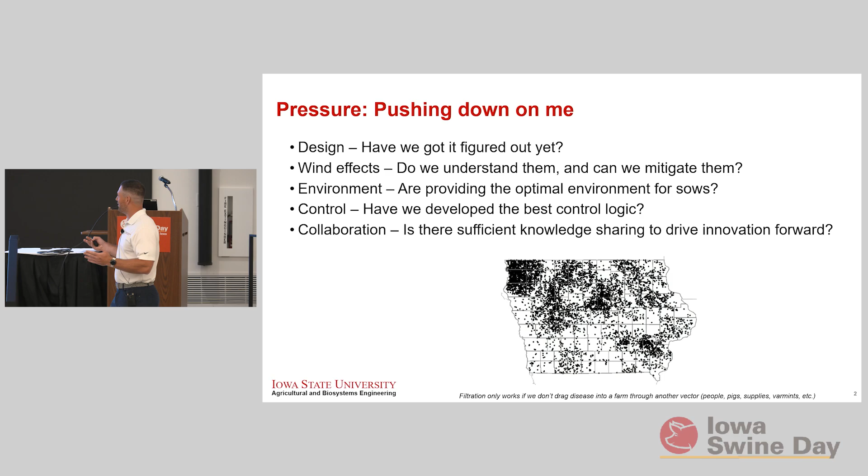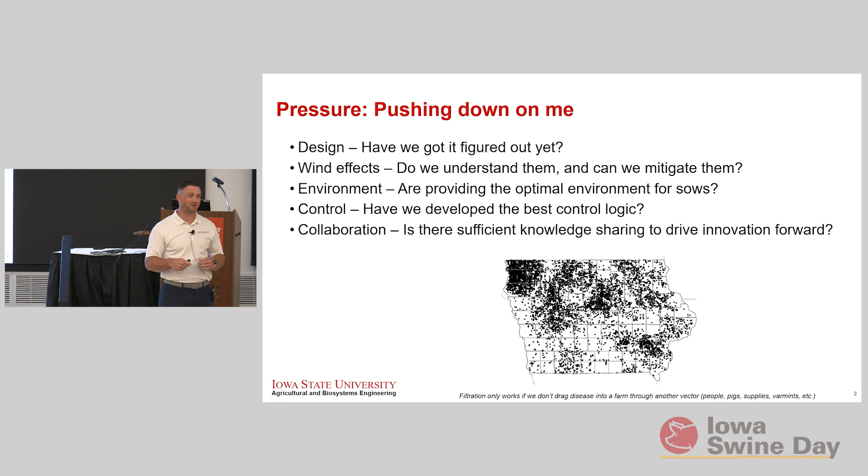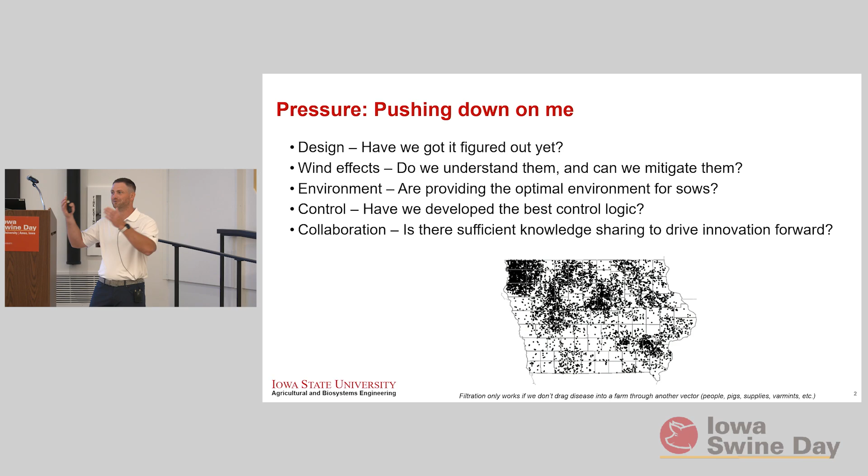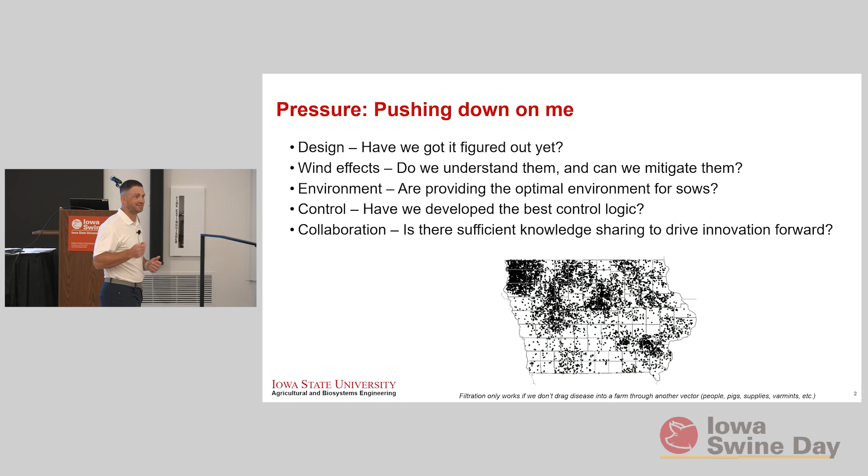So in areas of high disease pressure, filtration is generally a pretty good option because there's just a lot of pathogen in the air. The talk before me was perfect to set this up on filtration—that last line at the bottom, filtration really only works if we don't drag it in, right? So I think following those ABCs is a great thing. You have to have that done first, then comes filtration. If you can't do the ABCs right, I'm not sure filtering is really the best option, because filtration costs a lot of money to do and a lot of money to keep doing, and it's hard to keep it going right. So get the ABCs right—that was a perfect talk to go before, so keep that in mind.

So things to think about when considering filtration and other factors—these are just some common ones.

Location - are you in the middle of nowhere South Dakota versus in Hardin County? Two totally different locations with two totally different disease pressures. Climate also plays an important role when designing these systems, because different climates require different ventilation rates, different cooling systems, different things to think about.

Cost - is it worth it? Longevity - when am I going to have to remodel this, and am I located somewhere where I'm going to have to change filters more frequently? Pig needs - what type of pig is it, and what do I need to provide for it?

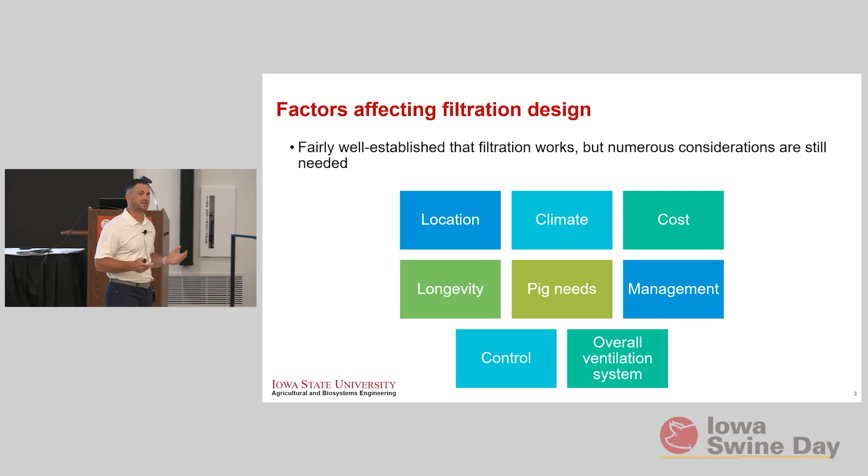Management - does it fit within our existing management structure? What is all going to have to change when we go to filtration? Filtered sow farms are a lot more difficult to navigate when you're inside them and moving about. They're not as easy - you can't do certain things that you could just do at a finisher.

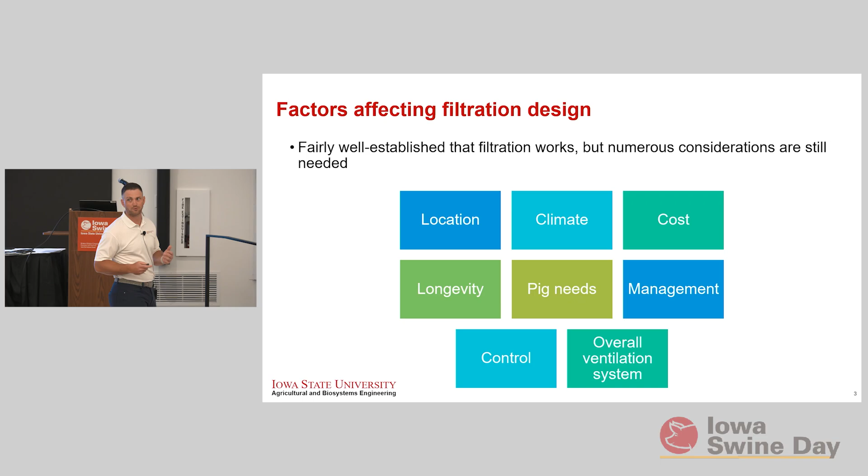Control - what kind of control logic am I going to use to do this? And then generally, the whole overall ventilation system is important to keep in mind, because these systems are far more complicated than a standard run-of-the-mill finisher. There's so many more moving parts, so many more things that all have to work together for that system to truly be effective and achieve the results we're looking for.

So diving down more into the ventilation side of things - air distribution patterns, where do I put my inlets, how do I get that distribution? Especially when you get to a lot of these larger farms, it's hard to get air all the way across a 100-some-odd-foot wide by 400 or 500 foot long barn. That's just a lot of volume of air to get distributed evenly.

Fans - what kind of fan am I going to use? Probably wouldn't want to use a belt-driven fan in some of these systems, because there's just a heck of a lot of pressure that those fans are going to have to overcome. There's some good ones, but those belt-driven fans don't hold up as well as some of the newer direct drive fans. Making sure we get the correct air exchange rate.

If it's on a negative pressure filtered farm, do we have enough soffit opening to get that air up into the attic so it can go through those filter boxes?

What do we do about pit transitions and annexes? Do we vent those, or do we just cover them up? How do we manage that within the whole system? If it's on a negative pressure farm, obviously we probably don't want those, because they're going to become inlets - then it's going to get sucked in.

Fan staging - however we want to do it, we've got to keep that in mind. Are we getting the transition between min and max correctly? Supplemental cooling is most likely probably just going to use an evaporative cooling pad, so that one's actually relatively simple.

Switching over to positive pressure is a whole different line of thinking than negative pressure - you actually have to bend your thinking. The more I think about positive pressure, the more it makes my head hurt, and how much I don't understand it sometimes, even though I feel like I've got a good grasp on things. When you switch to positive pressure, you do have to switch how you think about things, because it is not a traditional negative pressure system.

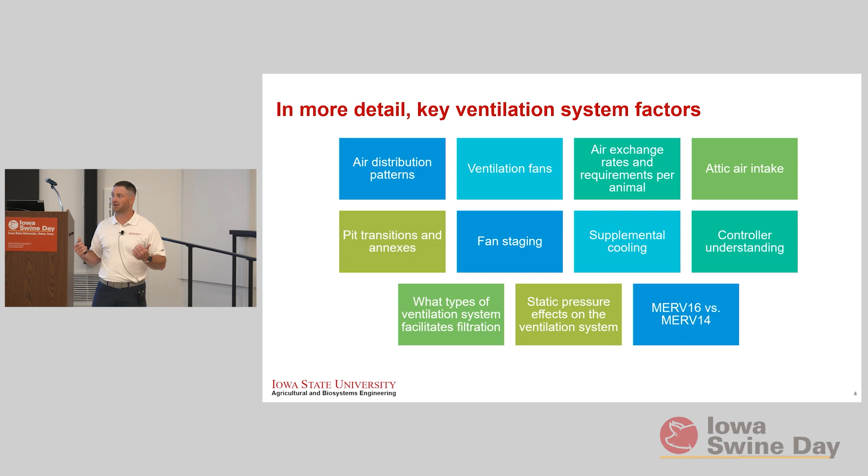The same is said on positive pressure. I think we sometimes overlook the need for reducing infiltration on positive pressure barns, because we've got to keep the pressure in - if it's going to leak out, guess where that air doesn't go? To the pigs. If it's blowing out through your attic, you're losing pressure and airflow that should be getting down to where the pigs are at, or if you're losing it through the room, then you're losing control of where that air is actually going to exit those barns.

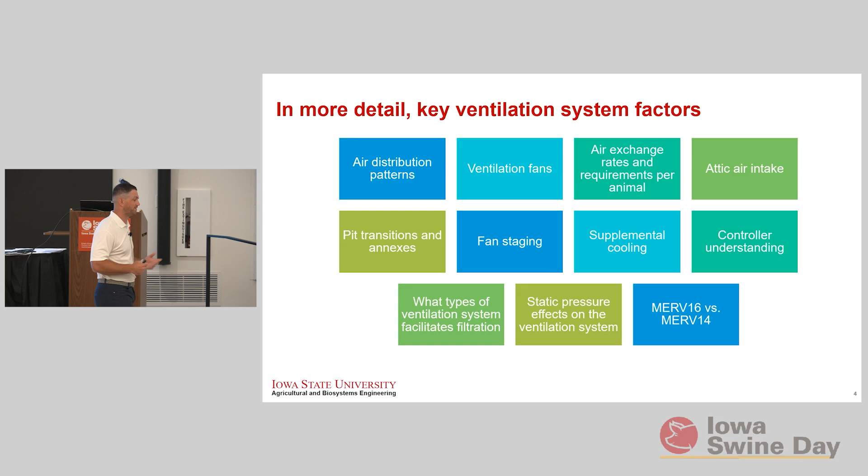Filter selections, everybody has their preference and what kind of pressure you're at in that area. So just a brief overview on negative pressure. I'm sure most people are familiar, but if you're not, it's basically taking a traditional system and adding filters to it where it makes sense.

Visualize where I'm talking, follow the red arrows. So you bring in air through an evaporative cool pad, it goes up into the attic. There are filters mounted on the tops of the inlets, then it goes through the inlets, and exhaust fans pull the air through the system.

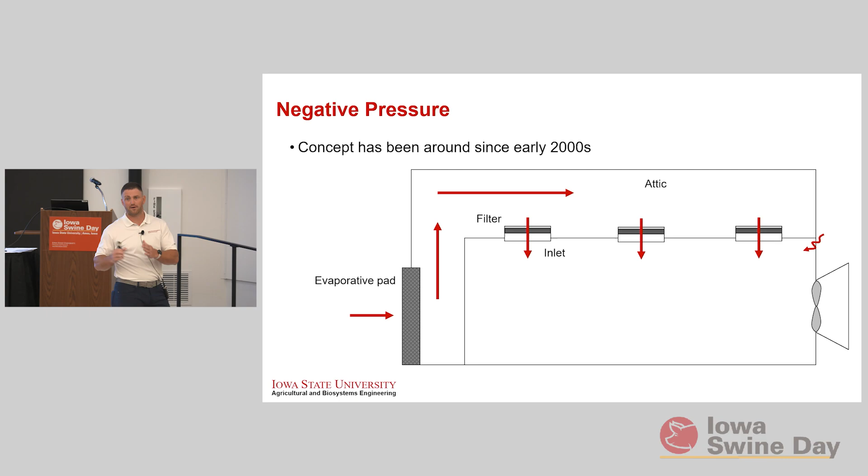What I don't have drawn here, and which I should, is either a double shutter—a lot of farms will have two shutters for backdraft prevention—and I should also add a sock on them too, just for good measure.

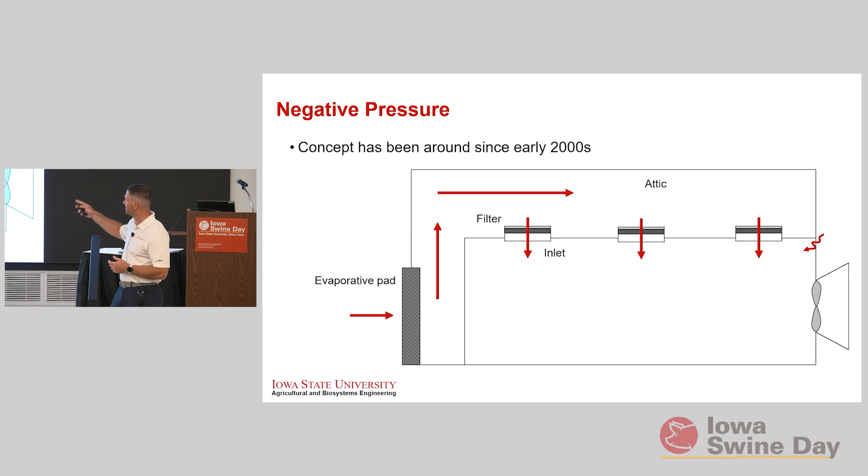You can also tunnel these by, instead of bringing air up into the attic, taking out that end wall and putting in filter walls, usually in a zigzag pattern, to increase the surface area to accommodate those filters. So what that looks like up in an attic are traditional filter boxes.

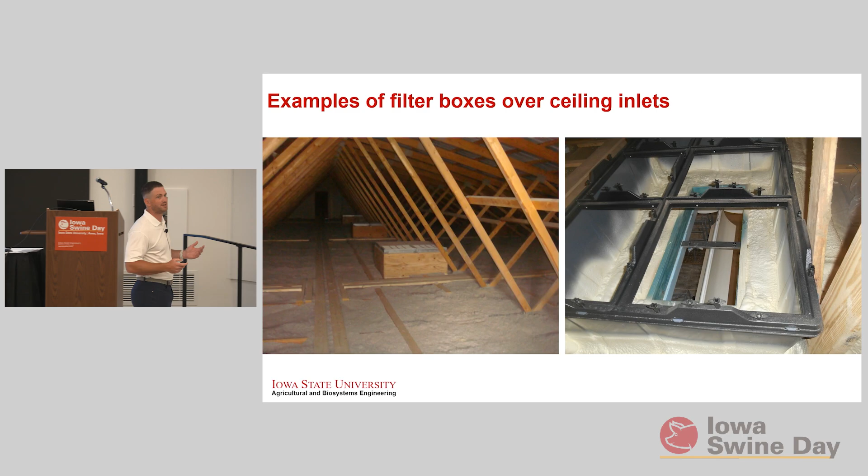A lot of times these things have to be spray foamed, because under negative pressure, air comes in, and we want to make sure all that air goes through those filters. For a more tunnel-style barn, it could also go up into the attic. Here's an example of air on the front side of the filters, and on the back side, again, all spray foamed. Minimizing infiltration is the most critical part.

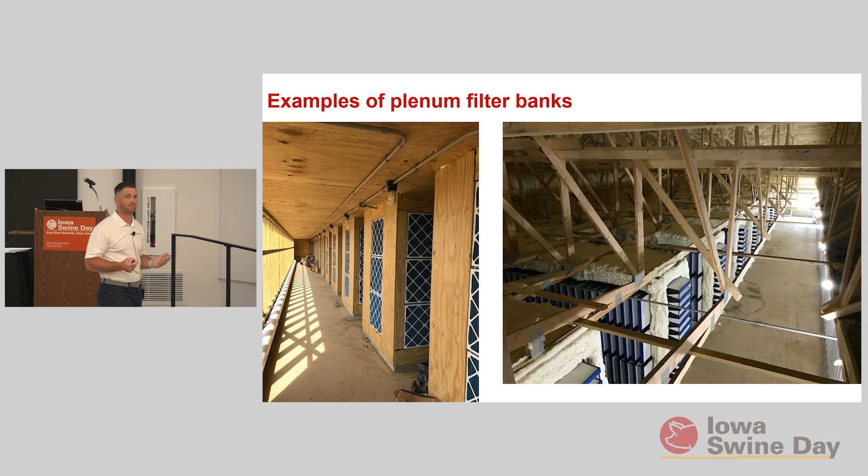Backdrafting of unused fans is critical. Shutters leak, they leak really bad. So if that fan is off, it is most likely leaking, and if it's leaking in and that air is not filtered, it is dirty air coming in.

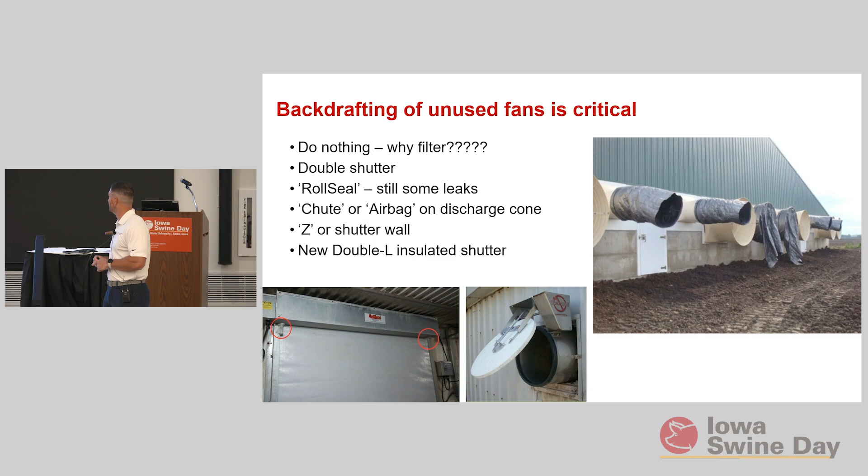There are a lot of different ways to do backdraft protection. The most common I see is a double shutter wall and socks. As much as I don't like putting socks on fans, because it reduces that fan's output even more than it's already being choked, socks are usually a good way to go—but those socks have to be maintained. A lot of times they're all over the place, have holes, or don't seal up.

So switching over to positive pressure, which gained popularity here in the late 2010s. To think of this, it's the opposite of negative—now we are pushing air inside the barn and having it exfiltrate, or leak out.

The benefit here is that air is going to leak out of the barn through any cracks, gaps, and joints where we can't seal it up, rather than pulling dirty air in.

Often we'll bring air through an evaporative pad, it goes through the filters, then the fans push air into the attic, which then pushes it through the inlets, and it exhausts out through a controllable opening in the room, usually distributed along the length of the room to help even out where that air gets distributed.

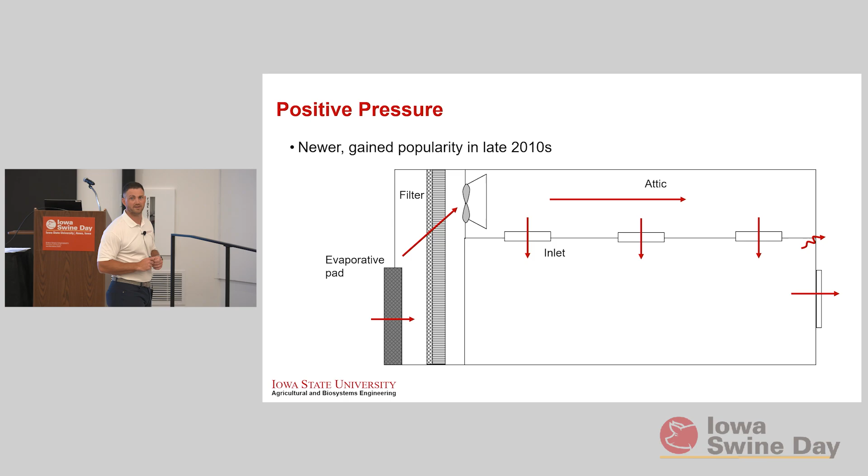So if you're paying attention, you'd realize there is negative pressure here, between the filters and the fan, and that area has to be sealed extremely tightly because it's a vulnerable spot where air could get sucked in. Usually those rooms are pretty much coated in spray foam to help mitigate that.

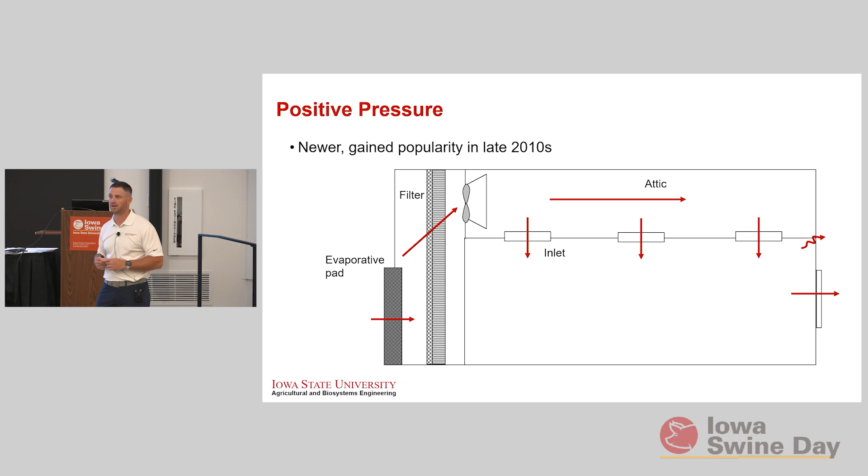There are a lot of different designs. Thankfully AP and Munters are in the room, so I got lucky on that one—these are just two typical designs. I'm not as good as Suzanne and don't have my disclaimer up there; it was on the first slide if everybody was reading, so no hard feelings to whoever's design I'm missing. There are different ways to do it.

There's a lot of variety—pads versus pads in front of filters, filters behind pads, each with pros and cons. Different ways to go between using ceiling inlets versus tunnel. Just a variety of ways to do it, each with some pros and cons.

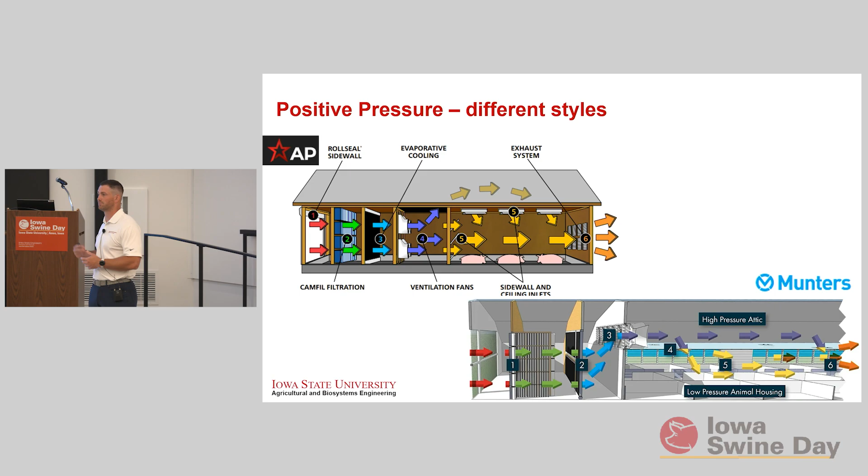With these barns in positive pressure, the pressure part is important, and maintaining that positive pressure is important, so we must monitor it. If I'm working with a lot of people, I'll ask them, have you ever seen a manometer before? Most say no, and then you go to a positive pressure sow barn and that's all you see. They're everywhere. It's like they disappeared for 20 some odd years and then magically reappeared, except now they're about 3 times more expensive than they used to be, almost $100 now. But you have to monitor pressure and watch it because you've got to maintain that positive pressure to keep the air leaking outward.

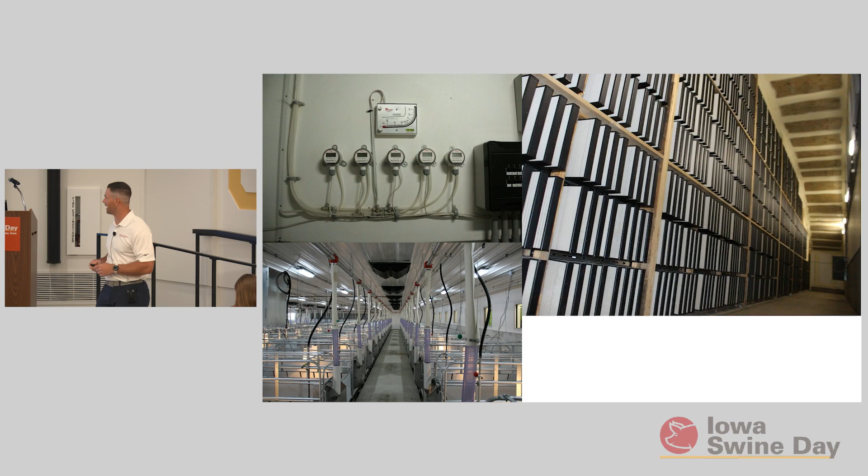So just examples of what it looks like, all through the ceiling inlets and backside of some of the filter walls. In this one with the fans in the upper right, that room is spray foamed, again to help keep that negative pressure chamber as leak-free as possible.

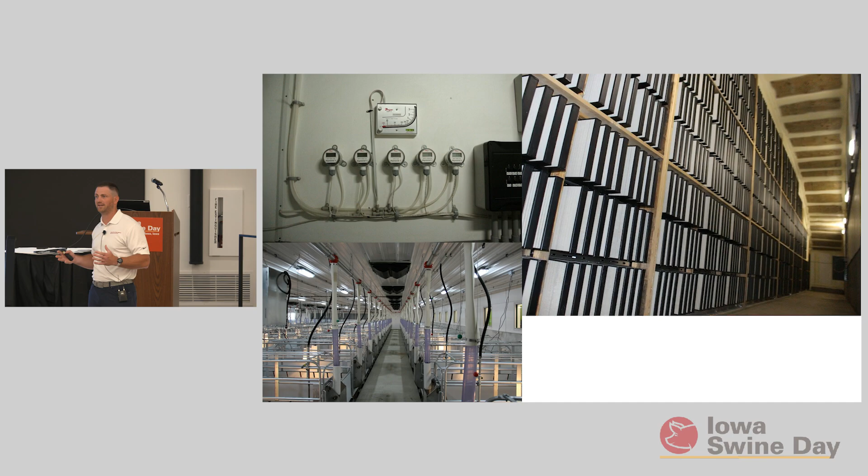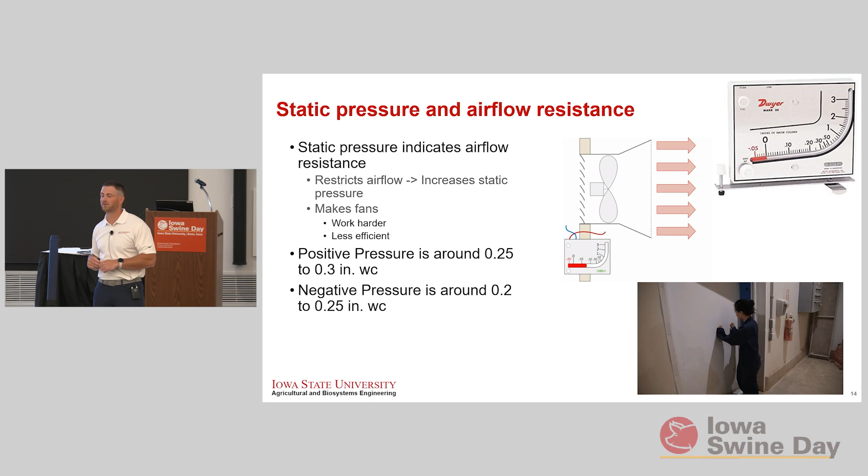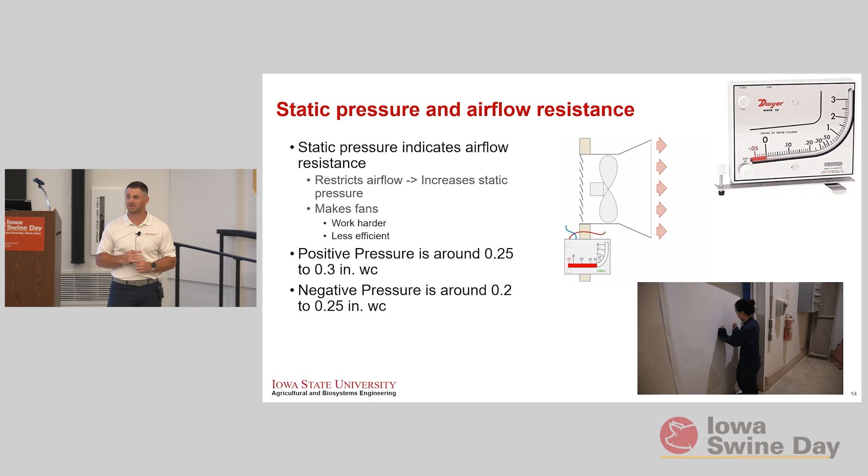Static pressure and airflow resistance, probably a review, but as static pressure increases, the airflow from the fan decreases. We really have to keep this in mind with adding filters, because all we do with these barns is add resistance, which decreases the amount of airflow those fans move. In positive pressure, those fans are going to work against about 0.25 to 0.3. Negative pressure is probably around 0.2 to 0.25, and I think that could even be higher as you start adding double shutters and socks, possibly much higher once you add all those things up.

Example of too high static pressure: if that door slams shut and almost takes your fingers off, that's probably a good indicator that the barn is choked for air and something needs to be opened up, whether it's in the soffit, inlets, or exhaust somewhere—that barn needs to open up.

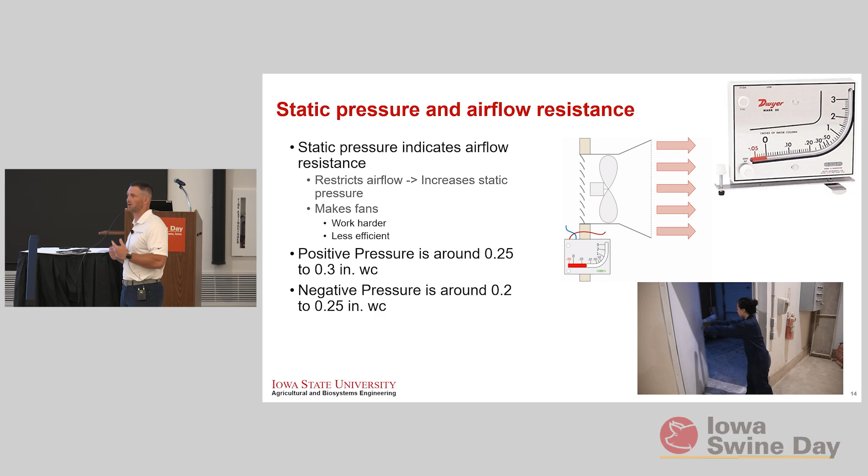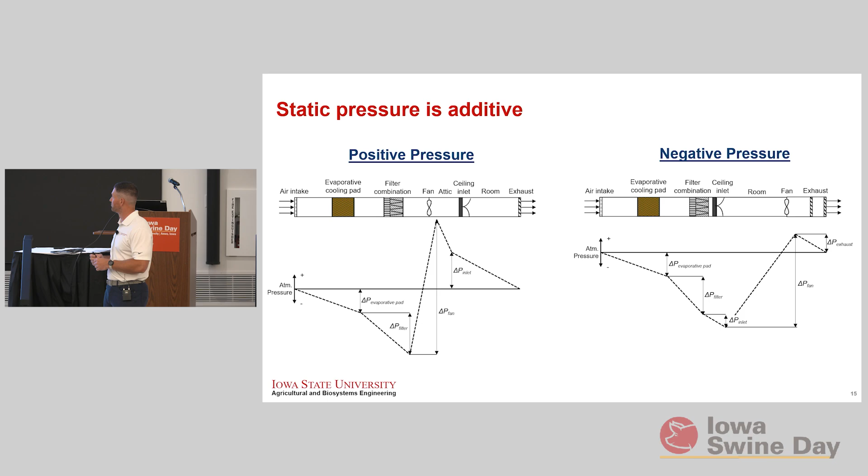So with negative pressure, the fans, or with positive pressure, typically pad and filter come before inlets and exhaust, versus negative pressure adds up all the way before it gets to the fan, where it's the last point in the system.

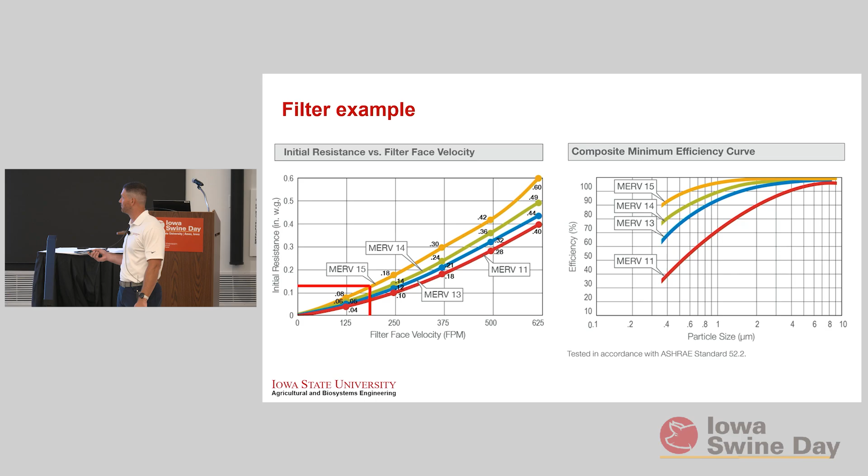Ceiling inlets are always going to be somewhere between about 0.06 to 0.08. You can't get rid of those in positive pressure because that's where the air has to go through, and you need a velocity through those inlets to make sure the air actually gets into the barn and starts to mix.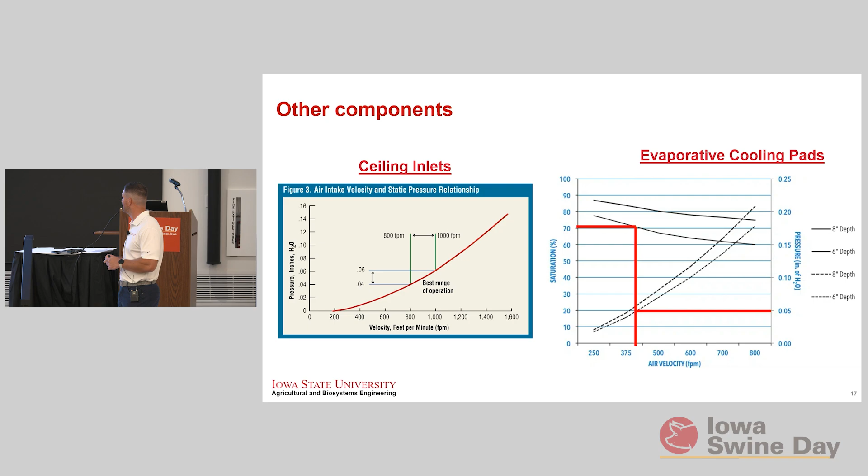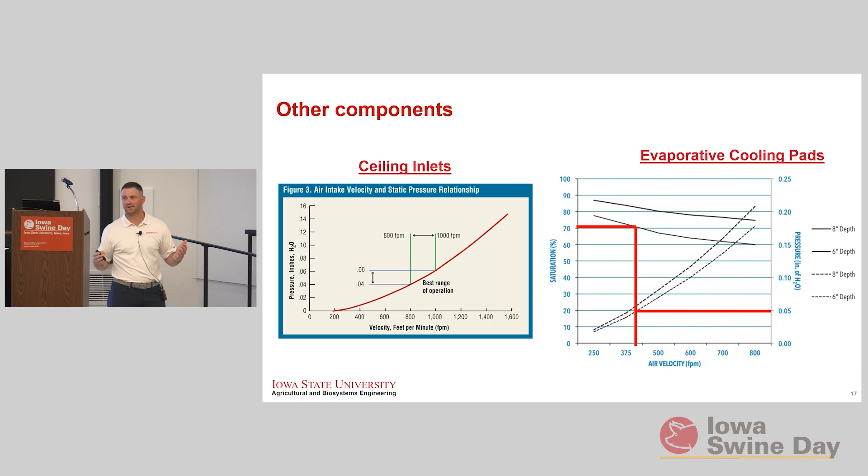Evaporative cool cells - the more I look at these, the more I think it's important to pay attention to different manufacturers and understand what the static pressure loss is and what face velocity you want to size at. They all tend to be a little different. This is an example I pulled, showing that at just shy of 400, they're at about 0.05 and a saturation efficiency around 70%. Some farms tend to go a little higher, knowing that if they have filters, evaporative pads are a little cheaper, and if you want to decrease a couple 0.01s off total static pressure, increasing that evaporative pad area is a good way to reduce restriction on the system.

Airflow ratio - not one we use commonly.

Oh, come on. What did I do? Sorry. Anybody know the airflow ratio equation off the top of their head? It was just up there for a split second.

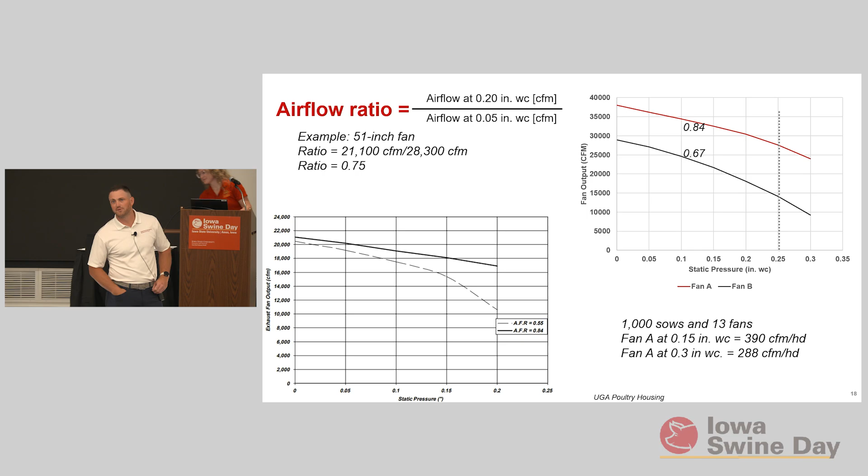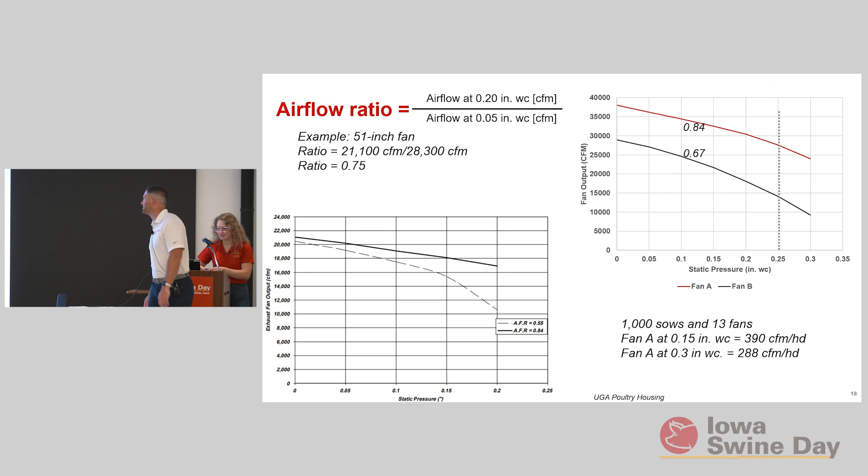Airflow ratio is the ratio of the fan airflow at 0.2 inches of water column to 0.05. What that tells us is how stable that fan curve is. We're looking for a stable fan curve, because as we add resistance, and as barns age and static pressure increases over time, we'd like a nice pressure-stable fan with a high airflow ratio. I usually like to be above about 0.8, because then as things build up and get dirty, that fan will still keep its output at a relatively high rate and not fall off, which you'd see with an airflow ratio below about 0.7. Those fans are going to drop off pretty good.

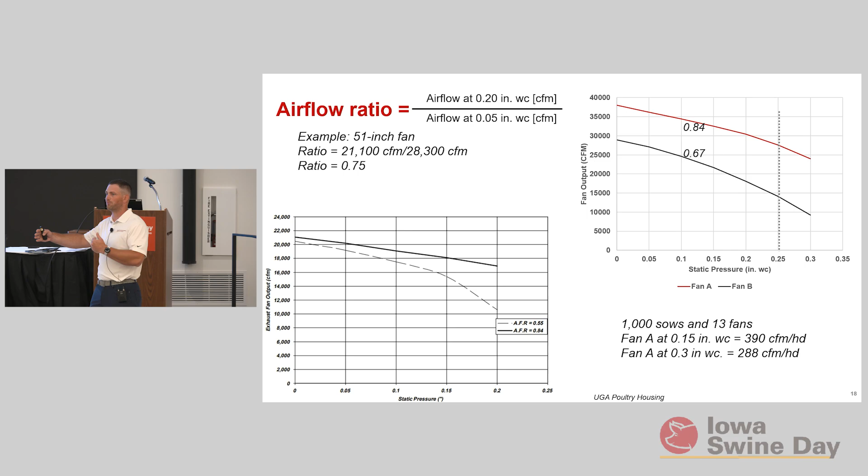These are two examples of fans showing the difference between the one on the left at 0.55 versus 0.84, and the other one's 0.84 versus 0.67. If you do some math on 1,000 sows and 13 fans, if you have fan A at 0.15 and over time it creeps up, you'll lose about 100 CFM per sow if you go from 0.15 to 0.3 - that's quite a bit across all those fans, keeping that in mind.

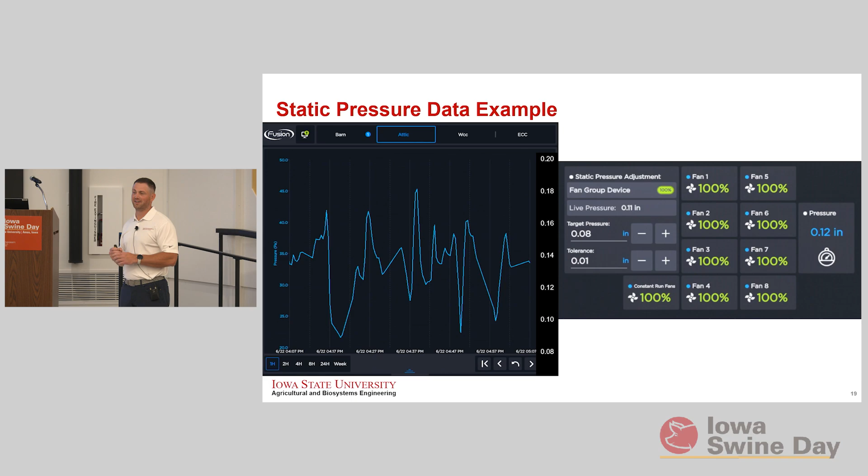As we start to talk about static pressure, this leads into my wind discussion. Here's an example that was sent to me showing the static pressure, and if you look at the dates, this was last weekend. What was it outside on Saturday and Sunday here in central Iowa? It was hot, humid, and windy. This barn was obviously at max vent because it was in the mid to high 90s, so this isn't the ventilation changing - this is purely maxed out. That is purely the effect of wind on that attic.

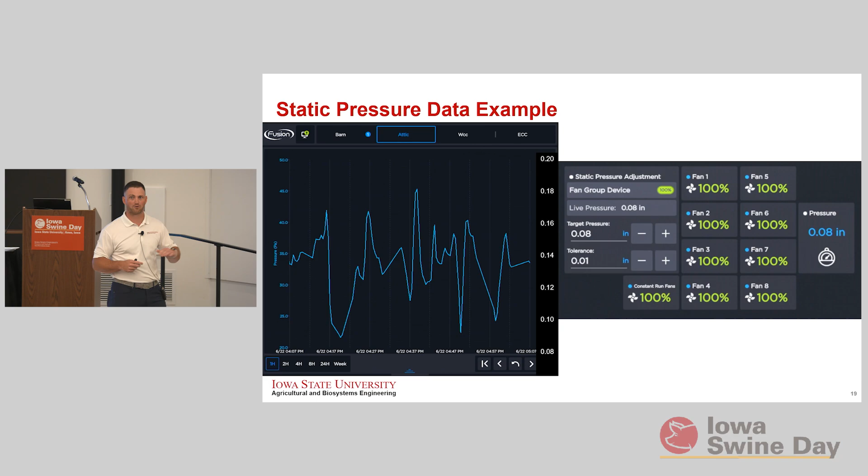You can see that's over the course of only about an hour on the left, and if you're paying attention to the screen on the right, that's the real time that was recorded. You can see how much that fluctuates in that short amount of time. This is what wreaks havoc on all of our systems - Mother Nature and the wind. For me, this is where it gets really hard to control something that dynamic. At what point, even with averaging, do you make decisions on something that changes that frequently and can never stay stable? I'd say it was a little extreme this weekend with gusts up into about the 40, 45 mile an hour range, but that's not completely uncommon.

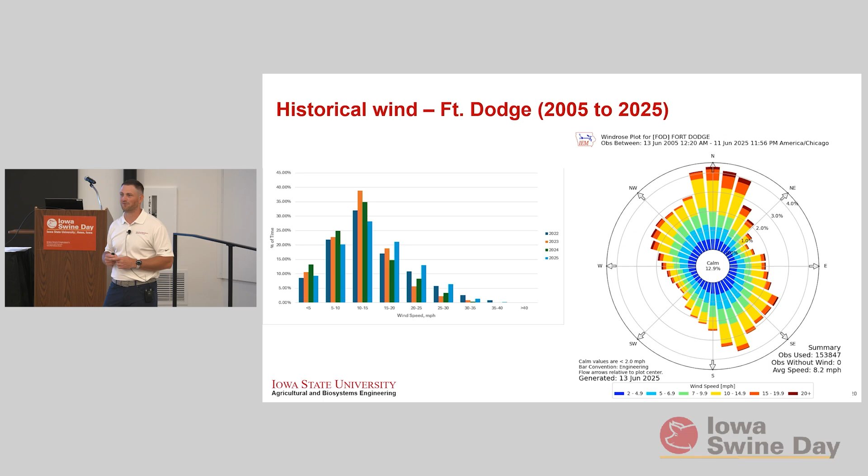The wind rose on the right is from 2005 to 2025. You can see when I made my slides because the date's right there - it was not the day before, it was actually a couple weeks. What I want to show is that the wind is easily in that 10 plus, 15 to 20 plus range. And more importantly, which direction is it coming from over that 20-year period? All of them, right? There is no direction that's safe from the wind.

And it looks even better when we dig into last summer and then this winter on the right. Prevailing winds in winter are typically out of that north-northwest, but what about all those other periods? It's surrounding the farm. Again, in summer, usually out of the southeast, but again, it's coming from every direction. So I think when we get talking to windbreaks and windbreak strategies, you have to be prepared for all wind. We can't just target seasonal winds because we're slowly losing seasonal winds and they're just becoming wind from every direction that we have to keep in mind when we're trying to evaluate strategies, and not just say, well, the wind's usually out of the southeast in the summer, so let's make sure it works for that solution. I don't think we can do that anymore based on just how much this wind is changing.

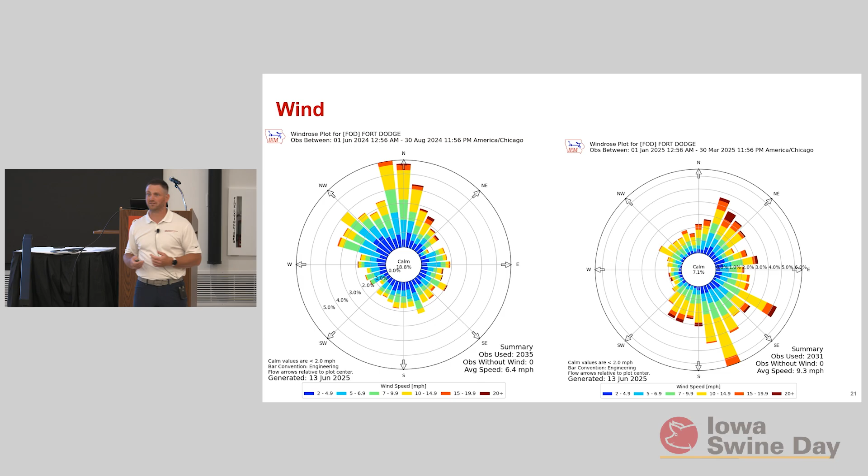So we're doing a study on windbreaks. I do have a survey out on this, and if you would like to take it, shoot me an email - my email's on the last slide. Some of you in here already have. But we're trying to figure out a survey of all the different types. We're going to try and use that to create different small-scale models, test them in a wind tunnel, then throw them into computational fluid dynamics, and then generate best practices that hopefully improve windbreaks across the industry. So that's our goal from that.

Quick question. Go for it, Mark.

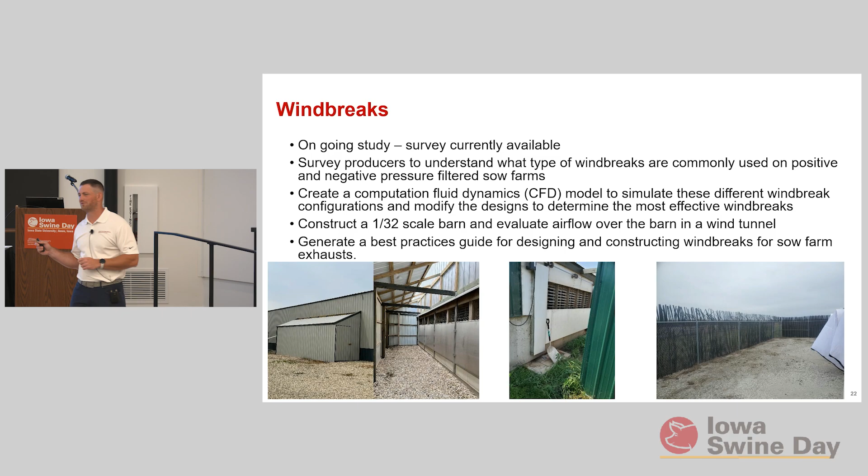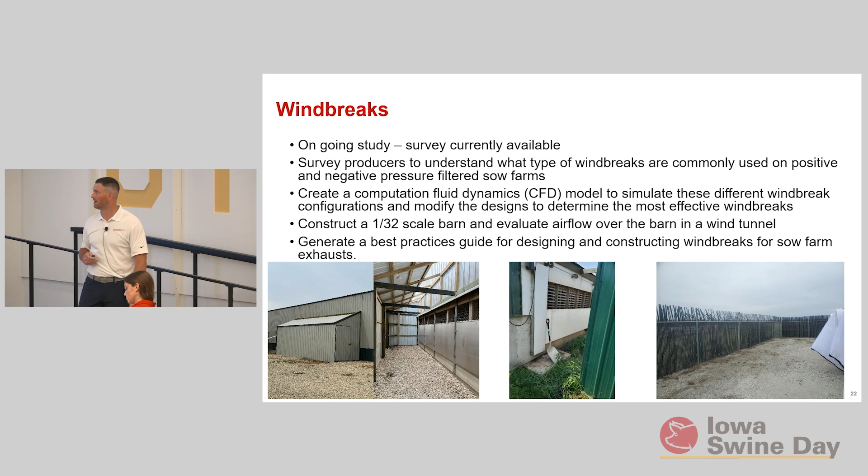Is that windbreak potentially close enough to compound our issue when our winds are the opposite direction? On a sow farm or natural finisher? I think more almost as a finisher. I'm not sure if that would really have that much of an impact on that. Might clarify this in a second. So all these different windbreaks, that's why we're after them - that's why we want to understand them better, just because I've seen a lot of different things tried and got to find a good solution for everyone.

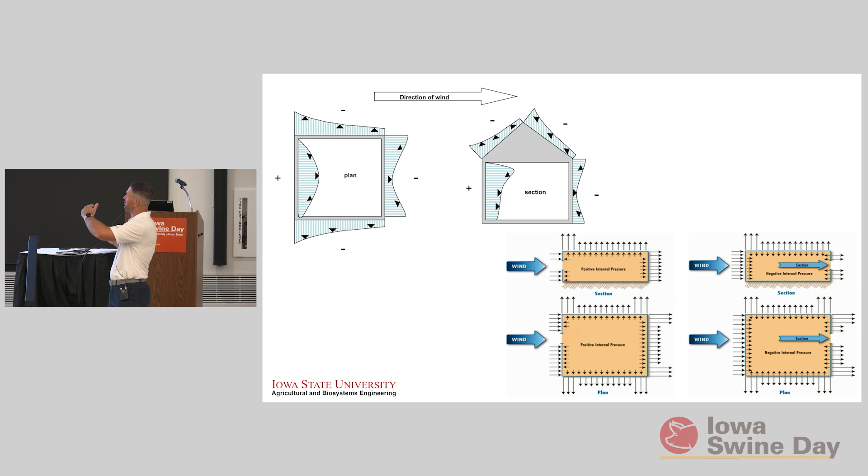So speaking of wind, I snagged these pictures. I wish I could claim them because they do a great job at showing windward and leeward pressures on buildings. They show how that wind exerts pressure on one side and then how it creates a positive and then also a suction on the other sides, and how when it moves around these buildings, it's quite dynamic, and there's a lot to consider in this, and it's not as straightforward as it may seem, especially when you get it coming at different angles. These are very easy winds that you could easily predict what's going to happen, and then showing what happens down there in the bottom right - if you have an opening, how it creates that positive internal pressure, versus then on the backside it creates a suction.

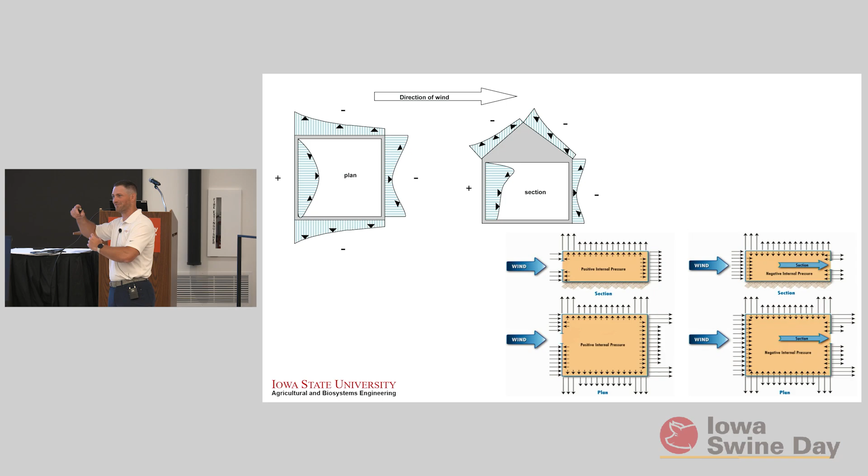So again, depending on which way the wind comes from, it's either going to create a positive pressure or a suction, and then just think about the season - so now, where we had a positive pressure, it becomes a suction and vice versa. So it's always changing, and then I don't have one where the wind's running parallel to the barn, and the impact it has on how that pressure works with how we do positive pressure.

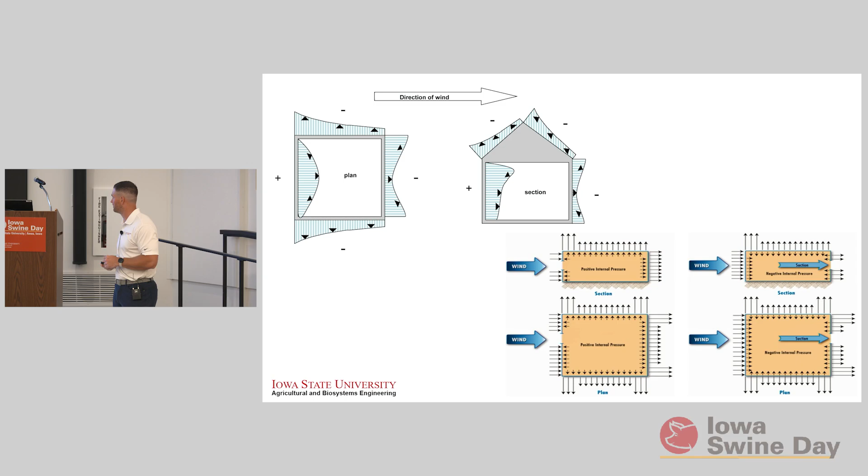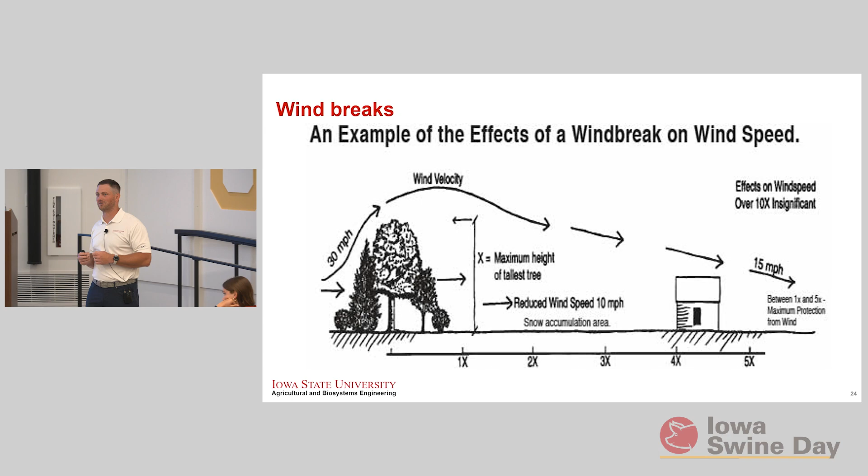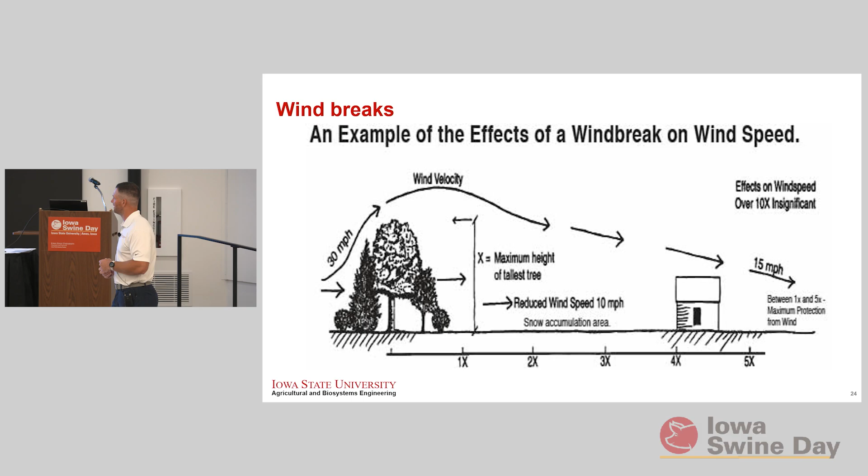Trees do a great job at blocking that wind way out and then slowing it down by the time it gets to that building, to really effectively reduce that wind. Especially trees would have been great when barns were curtain sided, because you would have wanted them all tall, and then you wouldn't have any wind going through the barn. So I think a tree with that higher, taller outline probably does the most effective job at reducing that localized wind at those barns, but that's not very achievable, right? We can't go figure out how to get 30, 40-foot trees around our farms.

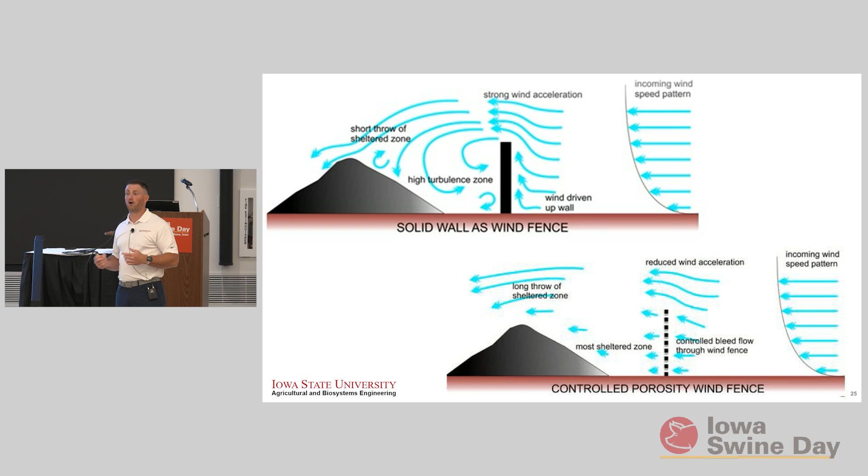So another one, I just pulled these offline. I can't claim the knowledge on these, but I think they're interesting to look at and how people have explored these things differently. Using a solid wall, which I'd say most farms have as their windbreak, shows how it creates a high turbulence zone, because that wind has to effectively compress as it goes over, and then by conservation of mass it all has to come back together, and it forms that turbulence zone behind there. Your shelter is really farther along, but oftentimes it's either going to hit a wall or a roof.

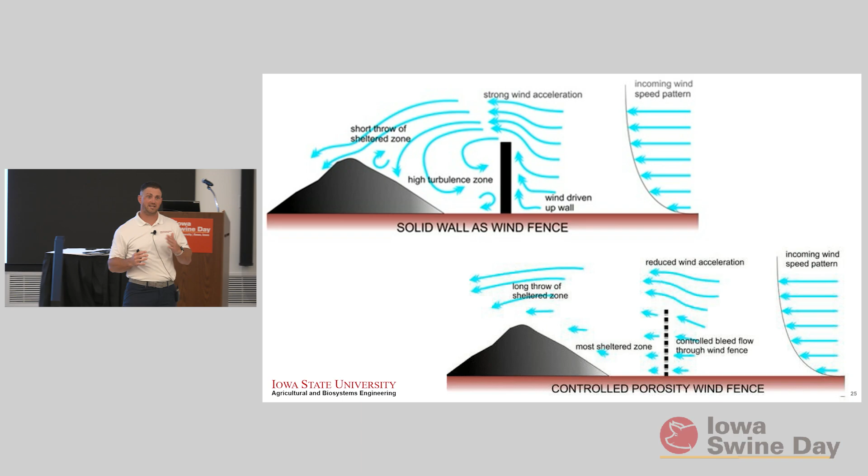So then what they show with a porous one down here, which I thought was kind of interesting, is really just trying to decrease that wind and then slow it down. But then you don't create as much turbulence because you're still letting some of that airflow through that windbreak, letting it reconverge rather than having it crash and try to figure out how to get back together.

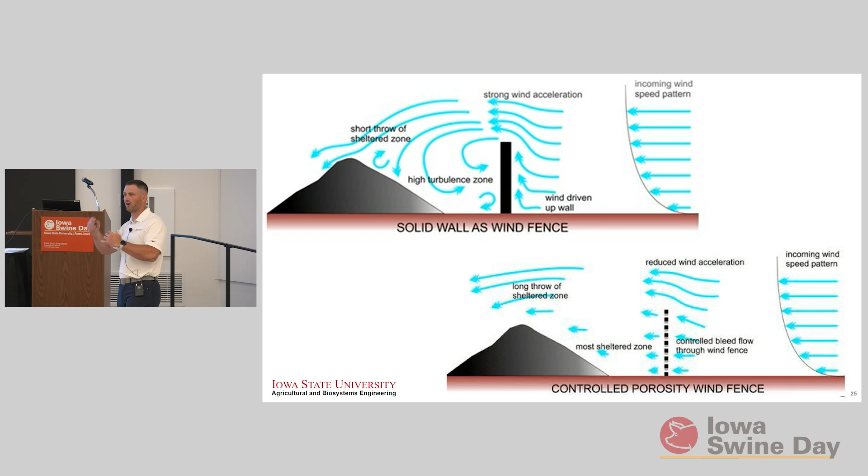So, environment. We'll talk a little bit about cold weather and a little bit about hot weather.

Oftentimes, particularly for sow farms and also for finishers, we design inlets off max ventilation. We have to make sure we have enough inlet capacity for how much air is going to go through the attic, whether it's a finisher or a positive pressure sow farm. So we typically end up with about three times as many inlets as we need. When you have that many, it's going to make the cold weather side a little bit tricky because we don't need all those inlets.

We also don't have an infinite amount of ceiling space, and we have to put them in rows. So they end up getting really close together when ideally we'd probably like them spaced out more, but that's just not possible when you have to fit that many inlets on that ceiling.

So it becomes really important to verify our inlet air speeds, and if we end up closing some or using only one side, it becomes even more important that we get up there with the Kestrel, make sure we're getting that 800 to 1,000 feet per minute, making sure we're getting good distribution. Some of the positive pressure barns do get hard to ventilate in winter just because of how many inlets there are and how much airspace the air has to move through across rooms in both directions before it gets its way out through the exhaust.

I recommend, if you can, use a spreadsheet, do some math, get things set up, get a program, get something you can reference so you can keep doing the same thing and improve it over time.

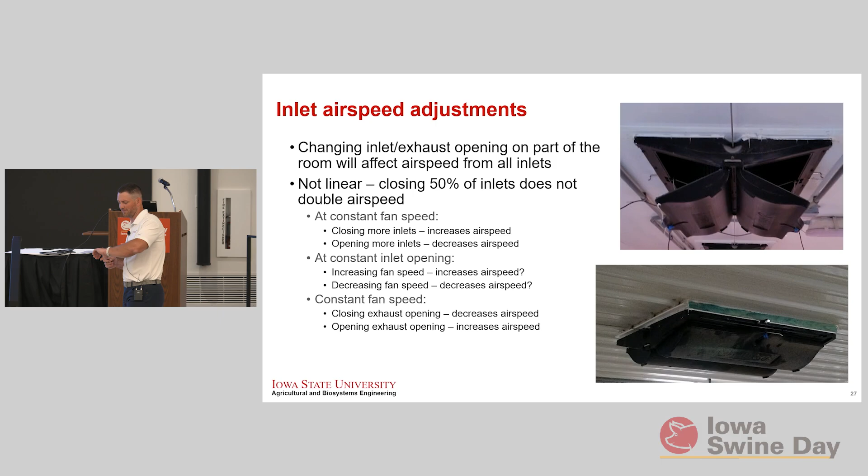Generally, that makes sense and holds true. As we keep our inlet opening constant and increase fan speed, sometimes the airspeed increases, but sometimes you've got to factor in what the static pressure does to that fan, and maybe the fan speed also slows down. So it becomes a very interconnected system, and we have to pay attention to the different impacts when we make these changes.

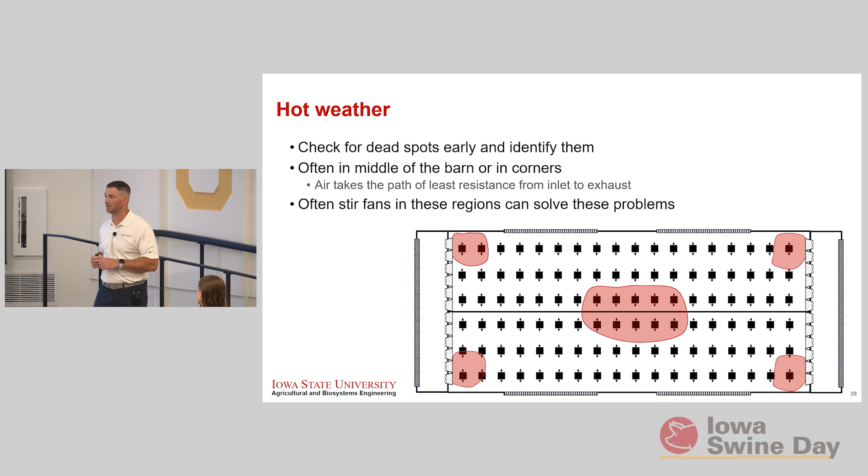Hot weather, these are probably the 5 hot spots that I often run into. Most of the times, the dead spots are in the middle of the barn. I've seen it's very hard to get air there. It's usually 250 feet in either direction from the nearest fan, and it's just a long way for them to then get it out through the exhaust.

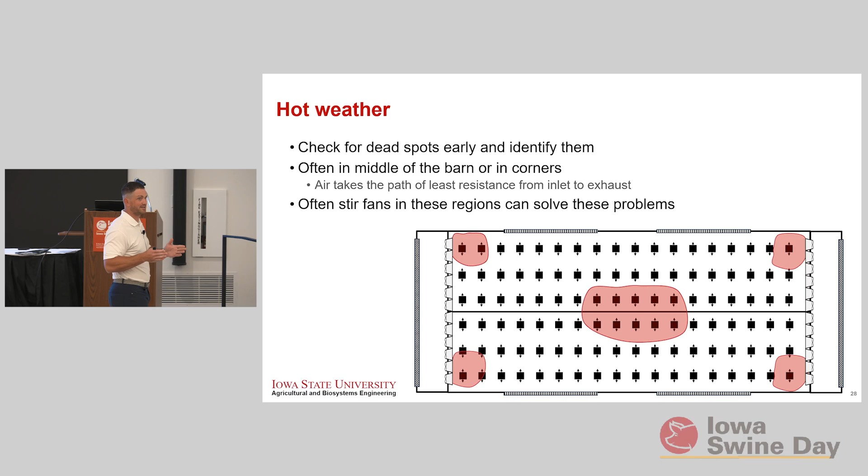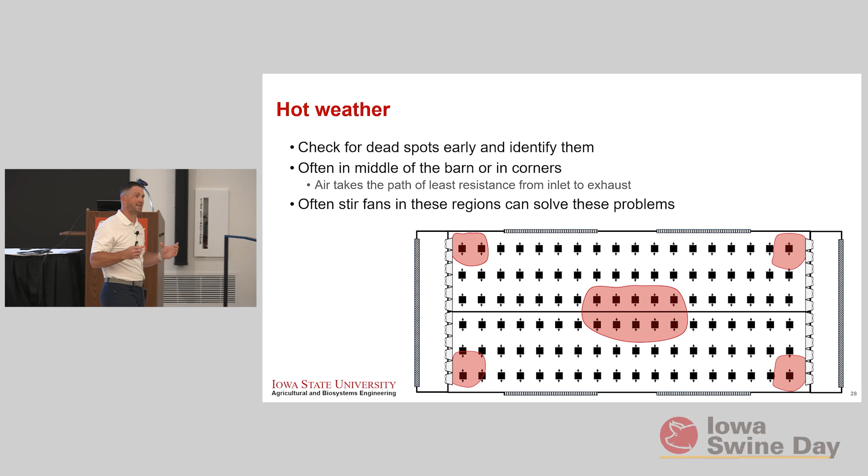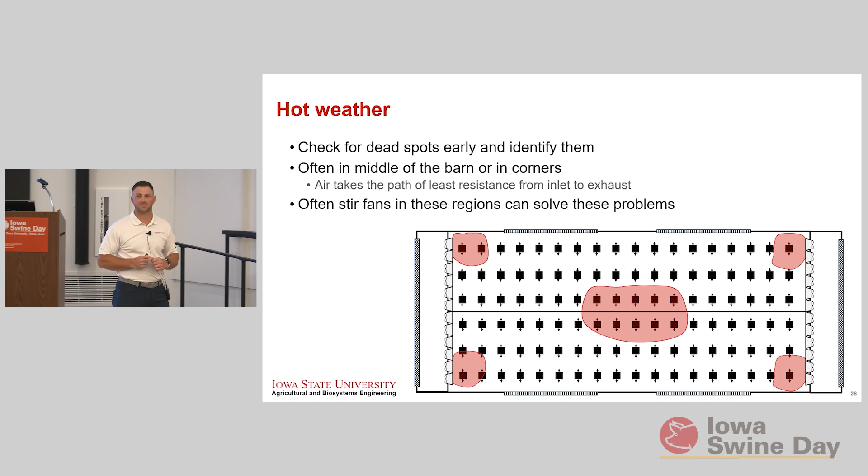I also see some issues in corners. I've noticed a lot of people start adding small exhaust openings in corners just to help get a little bit of air out, because it tends to create dead spots. There's no easy path for that air to make the correct turns, and it doesn't want to flow into a corner when the exhaust is 25 feet to the other side. So oftentimes I end up using stir fans just to help mix, or in hot weather, to help provide some airspeed and cooling over those sows in the middle of the barn.

Now we're going to talk about humidity, and unfortunately it started raining, because I'm not going to ask you what the humidity is outside, since hopefully there's only one answer: 100%, because it's raining. Usually I like it when it's about 92 degrees outside and real muggy. I like to ask the question, and everybody says 80, 90, 100 because it's so miserable. Most likely it's probably about 65, 60.

There's this rule called the 80-80 rule: if it's above 80 degrees outside, it's below 80% RH outside. That held true for 98% of the time, so that worked out. 98 is close to 100 for me, so that holds pretty true. If it's over 80 degrees Fahrenheit outside, it is less than 80% RH.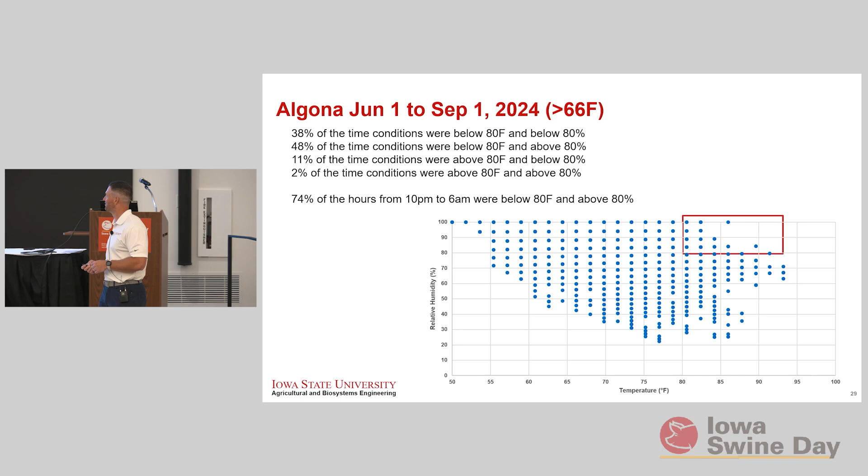Then what got more interesting is when I dug into this a little bit more. When it was below 80 and below 80% RH, it was actually about 38% of the time, which kind of surprised me. That's pretty dry, actually, and probably pleasant, shockingly, that we actually have pleasant weather here. Then below 80 and above 80%, 48% of the time, which makes sense because that's generally what happens. It's just humid. So when do we get the conditions of below 80 and above 80%?

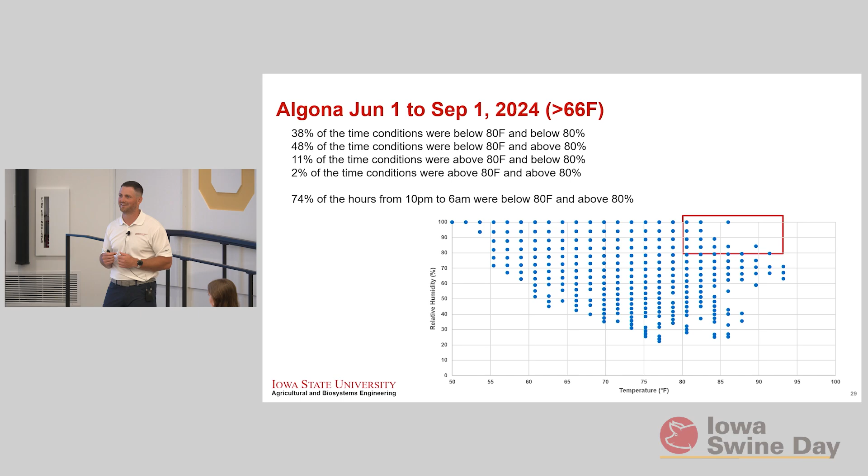When does that occur? It happens every day. Between what time period? Nighttime, right? At night we drop below 80, typically, and our humidity goes above 80%. Probably wait till the weather gets more consistent, and then you can check this - just watch it, today's a horrible day. Then there's another weird one: above 80 and below 80%, 11% of the time, which makes sense. It never feels that dry here. We're not Arizona, unfortunately, but we don't get that condition most often.

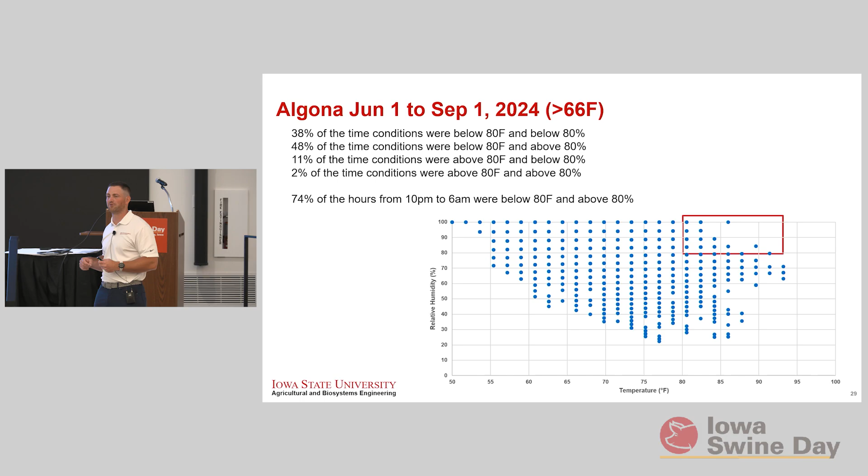So my point is, yeah, I even had the answer on the slide. My point is that running cool cells in the middle of the night or too early in the morning is somewhat ineffective, because we are most likely over 80% RH, and you can't really evaporate water when the RH is over 80%, right? Cool cells are relatively ineffective. You might get 1 degree of cooling if you're lucky, but otherwise, if those pads are on early morning and it's still maybe 76 outside, pads are probably not going to be doing much, and you're probably just adding moisture to the barn and wondering why the barn's still warming up.

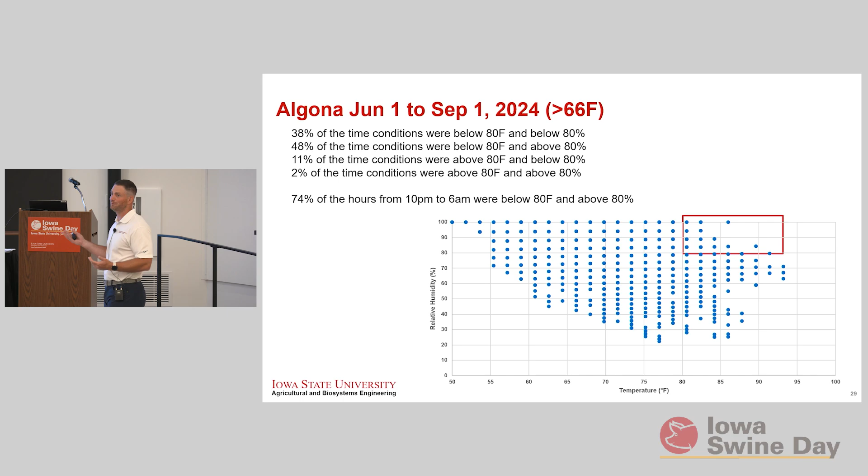But my pads are on - what's happening? Well, it's still really humid outside before it hits 10 a.m. or so. So for future considerations, I'm almost right on time - we need to be thinking about barns in the future, having the right systems, trying to future-proof this stuff, making sure we're thinking ahead.

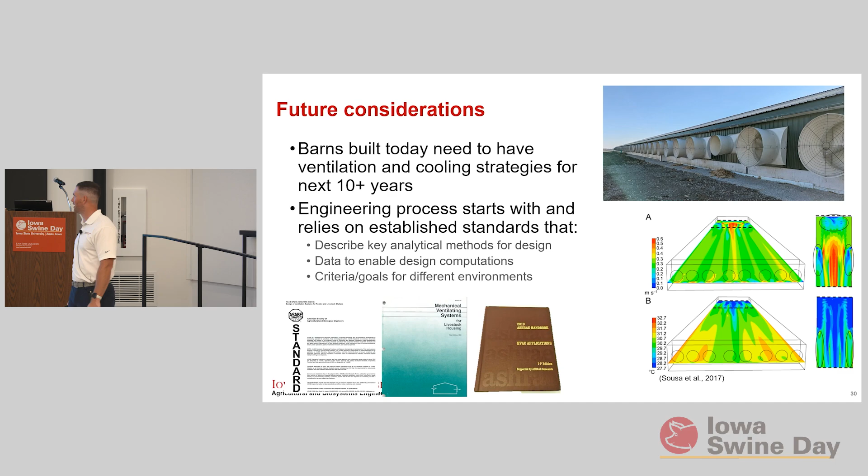If sows and genetics keep getting better, and nutrition gets better, do we have enough ventilation capacity for the future pigs? Do we need to update standards, do more modeling, figure out ways to make these barns better?

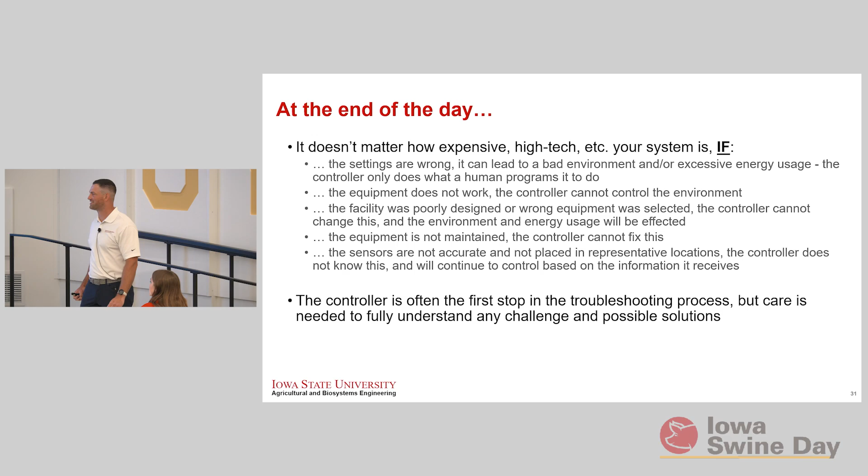So I'm going to leave on this one, because I've been in a lot of barns and I keep seeing the same thing over and over, and it's driving me nuts, because there's only so much I can do. I'm unfortunately not a skilled electrician or a maintenance person. I cannot fix things on the farm, I can't fix actuators or whatever is not working. So when I'm out there trying to optimize things, I'd really like to actually do that instead of having to point out what's broken.

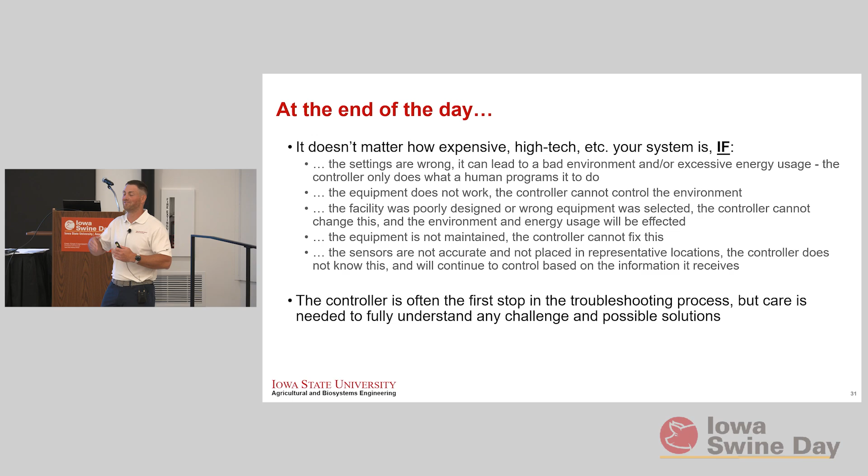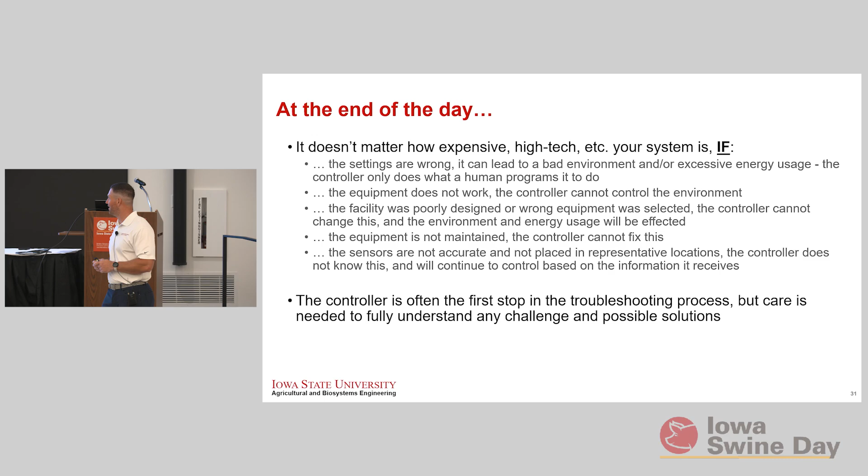Technology doesn't really matter if stuff's broken and doesn't work. If the human programmed the controller wrong, there's really not much you can do to try to make that environment better. So I really hope for keeping on top of maintenance, getting it scheduled and taken care of on time, just making sure stuff works, because we can't move forward if we're still three steps back trying to get something fixed that's been broken for four years. When was the last time you checked that all your fans work, or had somebody knowledgeable there to know if the fans don't work that they probably need to get fixed? The other day I flipped on a bunch of switches on a farm—guess what, one or two of the fans didn't work. It was 96 degrees and they were short two 48-inch fans out of 14. Maybe not the end of the world, but it still matters. That's my last one: make sure things work, and give yourself a chance for good success in the future.

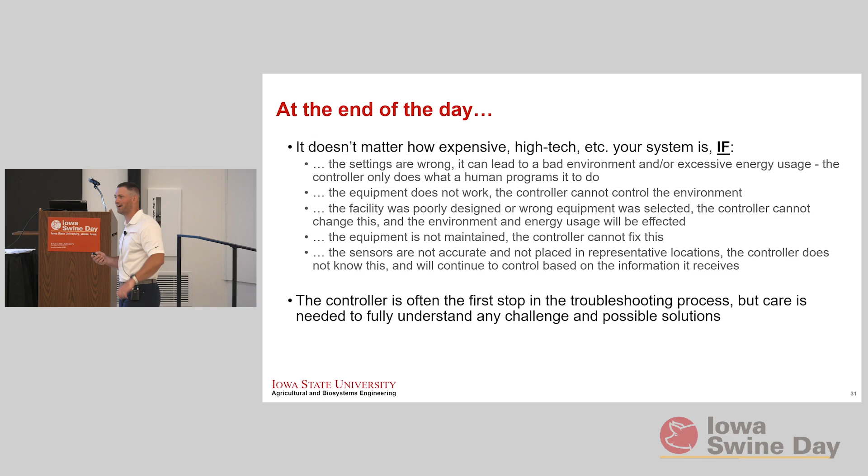Comparing the negative versus positive systems, one thing you didn't mention was the challenge of having more moist air inside being forced in through the walls and condensing, causing issues. I'm just curious, what are people talking about to try to reduce that effect?

That's a good question. I'm not sure I've really heard too much about trying to minimize it. Every time I'm in there, there's enough spray foam on joints that maybe there's not as much, but barns still leak like a sieve. I didn't know if people were going to the level of changing the building material to be less absorbent or have an issue with all that moisture. That's what some people talk about—actually going and changing what material the wall is made out of, going to SIP panels and steel construction. That's about the only new one I've seen. The rest of all the ones I'm on are all remodels, so it hasn't really changed too much.

That's one thing you wonder about—hey, just put positive pressure to it, you got no worries. It's like, especially with existing buildings, now you're forcing all that moisture into the walls and stuff. How long is it going to last?